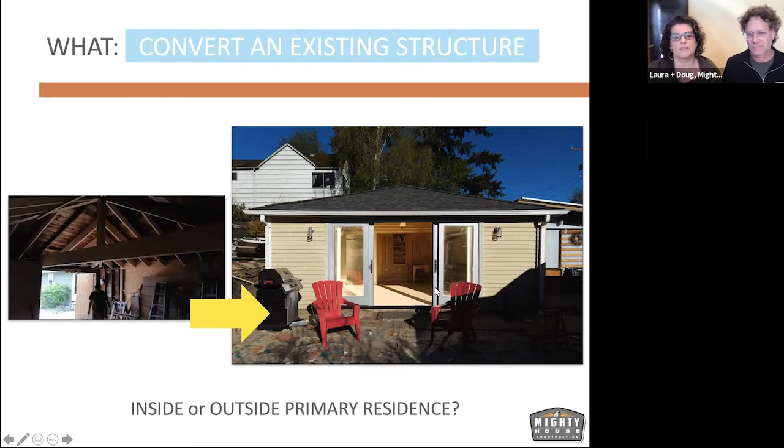So you have a concept that you want an ADU, and that's the first step. From there, you need to decide what you want. Are you converting an existing space, whether inside your home or outside? This was a garage already on the property that we converted into a DADU. It could have been an attached garage converted to an AADU, but in this case it was detached. Or do you want a DADU in the backyard that occupies new square footage? In one situation, homeowners wanted to expand their attic space and add a bedroom, but in their old craftsman home, doing so meant restructuring so much of the house that it made it really expensive per square foot to do the work.

They took down their garage in the left-hand corner and built this, not in its place because it was on the other side of the property, but as far as lot coverage goes, we built this. The square foot price to do the attic work, which would have only given them a bedroom, was the same as the square foot price to do the whole backyard cottage. Clearly it was a bigger price tag in the end, but the per square foot cost was the same, and they have multitudes of better use of the space than just a pass-through bedroom situation.

So making those decisions about what might work on your property leads you to the design, research, and programming phase of the project. This property I was just showing you ended up being where this number 2, this green area, is. You can see the house, and this is the lot size and shape of their property.

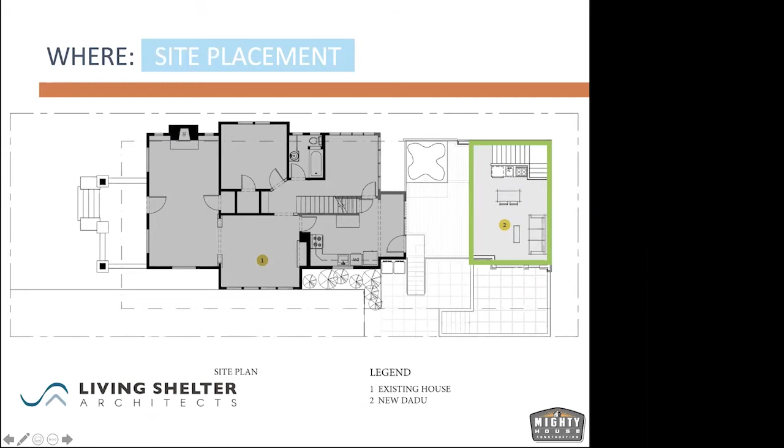Some of the rules around accessing the space involve walkways, accessible walkways. You can't just have a little walkway that enters from the back of the property. If you do, the easements move the building further into the property, because even the staircase going up to it needs more space to walk through. So you can't have it snake through the backyard in a little area for people to get to if you're renting it out.

There's a lot of nuances in that, and that's something an architect can look at. Every property is a little different depending upon if you're on an alley or not, so there's a lot of little factors, but that would be one thing to look at regarding your property. I don't know if the city's website gives you much of that or not.

This is the thing about the website, because I was recently looking some stuff up for a friend who has an unusual circumstance, and it's confusing. It gives you the general rules, but it doesn't give you all the nuances. That's where the value of having an architect who knows what they're doing can really research the details of the code. I even went into the code myself and thought it said they couldn't do what they wanted to do. It turns out, after talking to another architect who just permitted exactly what my friend wants to do, that you can do it. So it's how the code is written that sometimes gets complicated, and interpreting it with someone who deals with it daily is really useful.

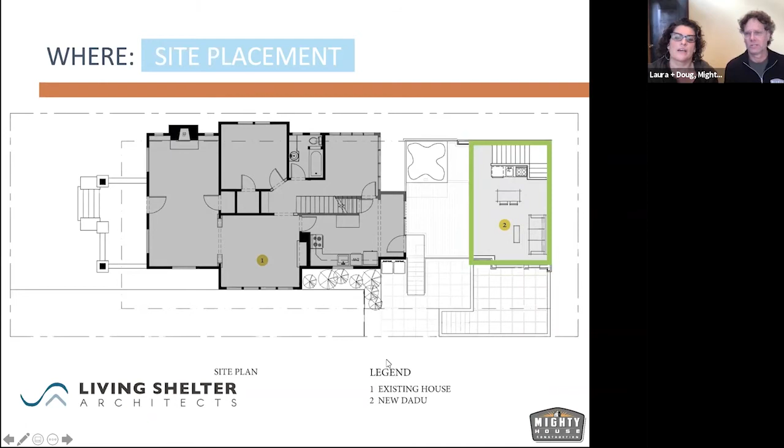The other thing that gets interesting around site placement is that this was going to be a backyard cottage, that was its intent. It turned into just a 2-story artist studio because this property has 2 front streets, 31st Avenue and Forest Hill, which are considered front streets for this house and all the houses on their block. Therefore they don't have a backyard, so they couldn't put a backyard cottage living space on their property. That was an interesting nuance.

So instead of making it into living space, which they really intended it to be with artist studios but hoping it could also be a living space, now they had to do just the studios. They couldn't put in the kitchen and have it set up to live in.

Hey Laura, we have a question that's right in line with this area you're talking about, as far as what counts towards your coverage quota: do decks and porches or covered patios count as lot coverage?

So there's lot coverage and there's also permeable surface, and those are 2 different things to be looking at.

Lot coverage typically includes your eaves out to the edge of your eaves. And then whether a deck counts depends on how high it is. A patio doesn't count toward lot coverage, but it does count as impermeable surface.

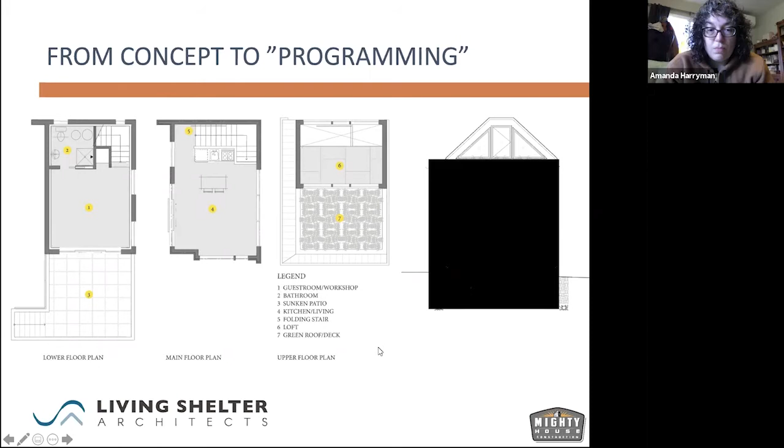And for them, it meant digging down 6 feet, and the height that is underground didn't count toward the total height of the structure. So that worked out for them. It's not inexpensive to excavate though, so that's another factor in figuring it all out.

Hey Laura and Doug, do you guys have any other tips on creating that master plan you mentioned before you start doing anything to your property?

So make a list and just write down things you generally want for your property and things you might like in the future. Write it all down, numbering them from most important on down, and you can start with that list. Then once you engage an architect, they will go through that with you anyway, to figure out what you want and what is most important to you.

You can start to work from there of like, okay, this is what we want, so this is what we're going to do now. But I do want to anticipate doing these other things, and how is that going to, the things I'm going to do later, how's it going to affect the things I've already done to the house. So you can work step by step, doing each thing in its order, being mindful of what you're doing down the road.

Because it might be that in 4 or 5 years we want to do this to the house, so you have to anticipate a little bit of what you want to do. Granted, codes may change and you might all of a sudden get new restrictions, and that's something you can't ever really plan on. But you can map things out and do things in anticipation of current situations, current codes, so that 5 years from now, when you're ready to do that project, you don't have to tear other things up that you've already done.

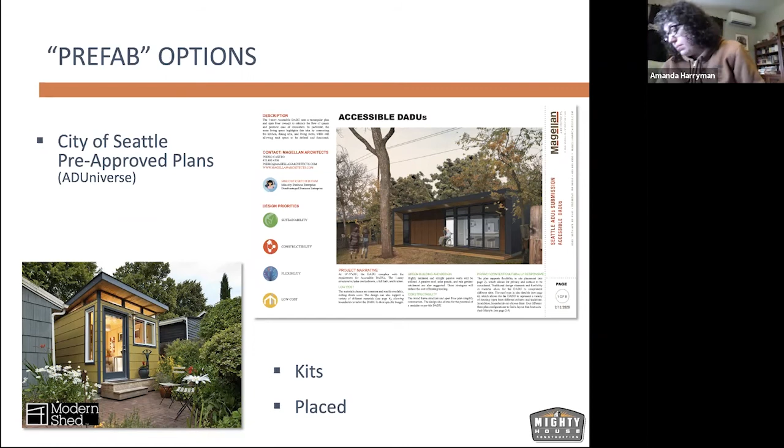Yeah, it varies. I think unincorporated King County is fairly similar to Seattle, but every city has its own jurisdictions. I think just recently Bellevue got backyard cottages approved. I know Snohomish has approved backyard cottages for certain lot sizes because we've been getting a lot of calls for that area, which we don't serve.

But in Tukwila, we are actually doing a project right now, which is just a basement AADU, and their codes are a little more restrictive, especially of size. So what we can do in this space is really small. Now things are supposed to be changing there, is what we've been told, but the requirements of what this person can do in their house makes it a pretty small, studio type space. It's not getting a full 1-bedroom size that they're allowed to do in Seattle.

Tukwila is a little bit different. So you have to definitely go through each city to find out what they're allowing - size, placement, things like that. Everyone's a little different. And that's where you can start with going through what the city allows, you might be able to get a little information from them, but then maybe you might want to engage an architect that can crack through that system there and their codes, because everyone's a little different.

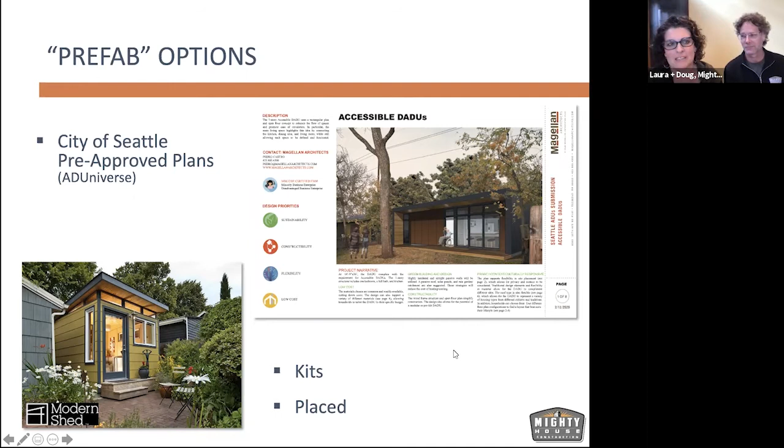So next, how much is this going to cost? What we really recommend is that once you have the concept and you've engaged in the design process, while you're still at that conceptual level before you've gotten your permit and before you've spent thousands of dollars nuancing the design, get it in front of us or another builder and have us do a rough estimate of what we think it's going to cost to build that. It's never a detailed estimate at this rough order of magnitude stage, the ROM stage, or what we usually call ballpark. But it gives you an idea.

They'll look at your plans and think about other similar projects we've done and throw numbers down of what we think it might cost to do the project. That at least starts to get you into the realm. There are factors in the cost that are hard to understand until you really start looking at your lot and where you're going to do things.

One of the biggest is the plumbing. Can the plumbing drain line just connect to the existing drain line on the outside of the house somewhere? It turns out the DADU is at a lower height than the drain line, so then you have to get a sewage ejection system to move that, which is another aspect of cost. All these unique things, getting power out there, anything like that, nobody can give you full costs on that until it's mapped out and figured out exactly where the heights and things are to get that in there.

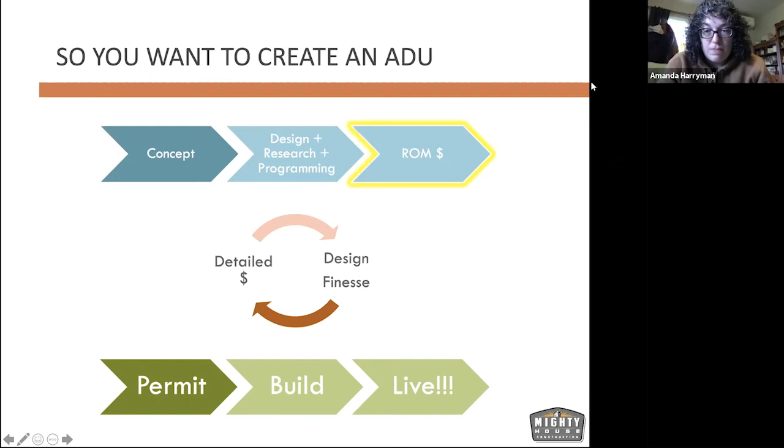We had a question about sewer lines and DADUs - always questions about sewer lines. They understood there's a fee from King County to get the sewer line connection to a DADU of 10 to 25 thousand. Is that true? I've heard people say that, but we haven't seen that in the city of Seattle, so I'm not certain about that piece. I'm not sure on the fee, but it's not that expensive, at least.

Besides the sewer line placement and other things, they want to make sure it can handle the extra material coming down it. They also have to factor in your neighborhood - how big is the main line going down the street? They'll look and say, oh, everybody on the street has applied for a DADU, the main line can't handle that extra volume, so we're going to have to replace the main line. The city says, well, we're not going to pay for it, you guys have to pay for it somehow.

So it's things to look at like that. Hopefully for your sewer line, if you're redoing it all the way into the paved concrete street, you don't have to do the connection. Because if you have to cut into the concrete street, you have to replace the entire 10 by 10 individual panel, each one you cut up to do. And that's thousands of dollars for each one. Instead of doing a nice little cut or section, they require you replace the entire thing. That does add a lot of cost into just getting the sewer line alone.

It sort of begs the question, what about gray water systems and composting toilets? You can do composting toilets and gray water systems, but it's complicated from a permit standpoint, especially with gray water systems. They want to ensure the water is going to a spot that can handle that additional water, and have a backup for when, especially during winters when we're getting all the rain, that additional water isn't oversaturating the area, and can then hook into the sewer system. So you have all these redundancies that can get expensive, but depending on your situation, they may be less expensive than the other work they're making you do for the sewer piece.

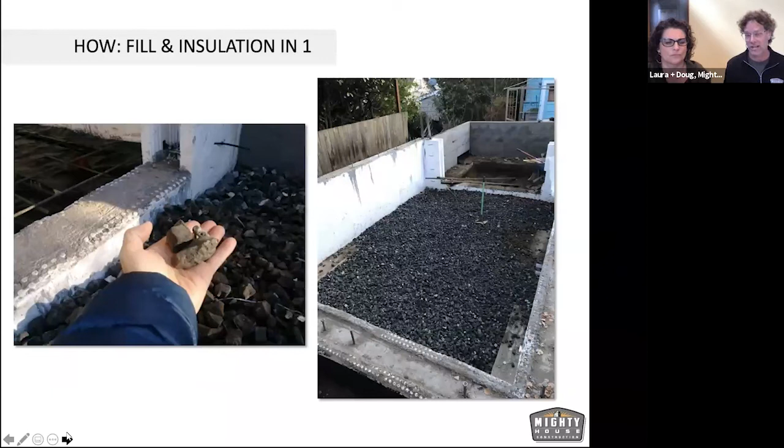So we tend to try to do things on the building end of it so that it's going to make it much nicer to be in and use a lot less energy once you're in it. And it's also healthier for a lot of the things that we're doing. We stay away from anything that is going to off-gas and have other issues for your health down the road that you might not realize is being a health issue.

Some of these products here are just different forms of insulation that you can use, like the sheep's wool insulation. The nice thing about that product is even if it gets a little wet, it doesn't mold and it doesn't destroy and break down. Most other insulations will do that. Your basic pink insulation gets the tiniest little bit wet and it's just dead and destroyed and has no R-value left.

So this is a nice, really healthy product, so that when you're in the space, you can be in this space and not feel like you're breathing in tiny little nasty dust pieces the whole time. And that's a great benefit. We've had to do that on health projects where the homeowner is extremely sensitive to anything harsh, so we had to use wool insulation just because we couldn't add a factor in that was going to be detrimental to the person's health.

Another way to do things is like this roof, which is called Gutex, a rigid insulation that goes on the outside. By doing this process, we can create an unvented roof for it, which can create a warmer roof and use less volume of space potentially to get your R-value for your roofline. And it creates a better airtight overall space for living.

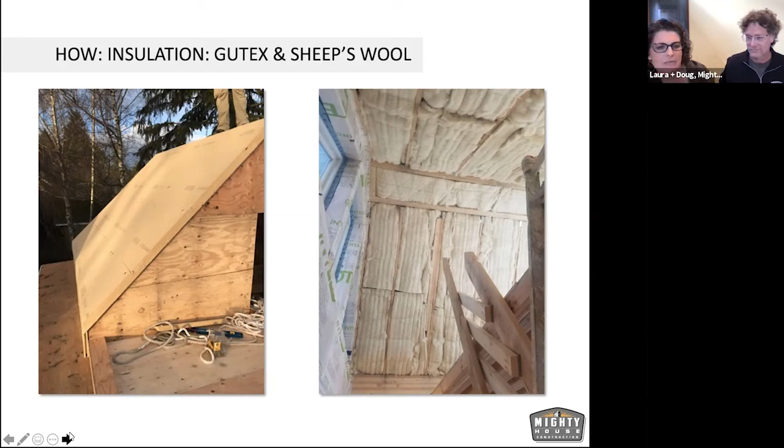So this is a building process that you can do - it's not required, but if you do this kind of process, your quality of living inside your house is going to be a lot better. And also your energy usage, based on how this is built, is going to be really low.

For that one DADU that we did, which was built down into the ground a bit, we did a lot of this process on it. We went there during the winter just for a dinner party, and we had to open up the doors because it was actually too warm in there. They didn't even turn the heat on because it retained the heat so well just from the people's energy in that space - the climate was much nicer. They've said they've rarely even turned the heat on in the space because it stays so comfortable year round under any condition.

Obviously, if you build something that's super airtight like this, you're going to add other systems, like an HRV or ERV, so that it's regenerating fresh air. Because if you build it too airtight, you're going to lose all the good oxygen that you actually want in the house, so you need to replace that. There are systems in there to help factor that in, and pretty much any new space, you're going to be required to do that too, because they're requiring you to build it more and more airtight, and they need fresh air to come into the space.

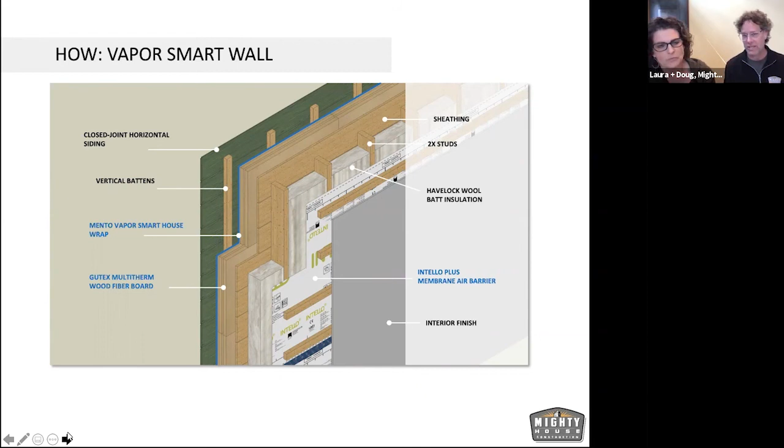So they lined the inside of the walls with plastic before they put the sheetrock up. Any home I've ever done remodeling on that has this has tons of black and white mold inside those walls, because it has held the moisture inside the wall.

And these kinds of systems that we're putting in now are called vapor smart. So the walls can breathe when necessary. If it feels moisture in there, it releases it, whether into the building or through the outside of the building. And that's a huge benefit to the quality of the house.

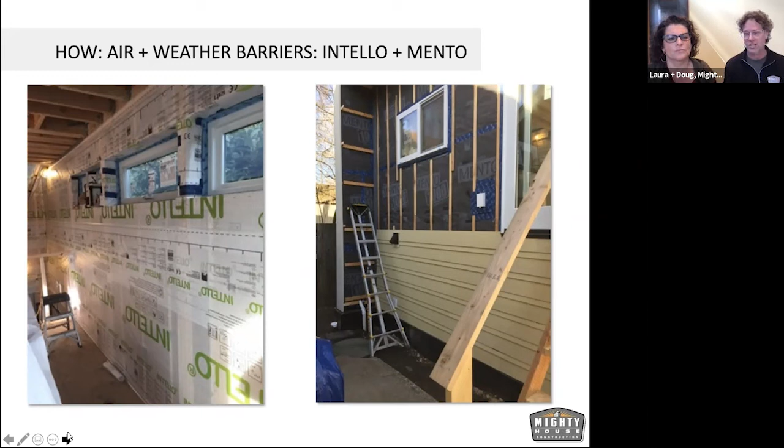Because even though you might have this great wall system done of some other type, if it's holding moisture in the wall and it's molding, that stuff will slowly seep out, and you're just breathing the bad aspects of that in. So it's the health of you, it's also the health of the building, like Laura said. So the walls breathe, you can breathe, but it's not drafty in any way. It just knows when to get the bad things out of the wall. And then you could end up with a nice, easy space.

When you use just a trickle vent or something along those lines, and you're putting cold air into your space, then you need to use more energy to combat that and heat more, and then you create a cold spot wherever that is in the room.

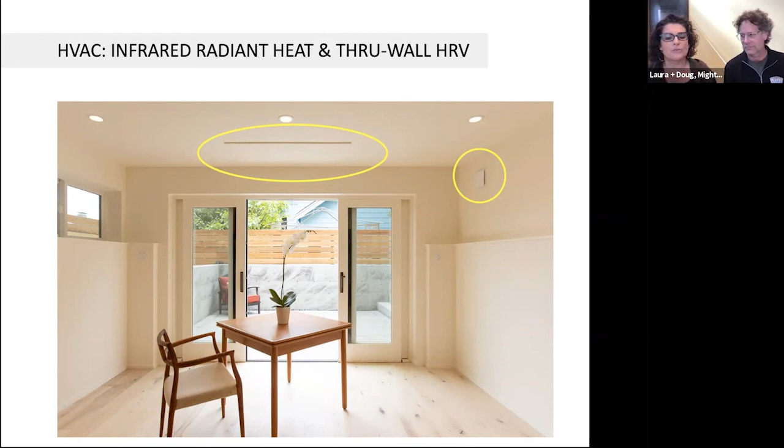There are some new energy codes that mean you have to use ductless heat pumps in most cases, like that little guy on the ceiling or on the wall. But you can offset with infrared in other spaces. So depending on how your space is laid out, this can be a really great solution.

I would recommend, if you have a house and you're converting the basement to an additional dwelling unit, and you have ductwork blowing into that space from the main house, sealing off all the ductwork blowing into the basement, because sound travels through the ductwork. So you can stop sound between the two units.

It also means you don't have control—there's one thermostat upstairs, so you're controlling the heat downstairs with it, and that person might not like the temperature. So it's nice to have a separate heat system—you might put a ductless heat pump head down in the basement or infrared panels. That way you can monitor how much energy they're using for the unit, and they can control what's comfortable for them, rather than being controlled by what you want your thermostat to be. It's good to help separate that.

And when they're separated, you can figure out exactly how much energy they're using, so you can factor that in if it's a rental—whether to bill that out separately or have it included as part of the overall rent of the space.